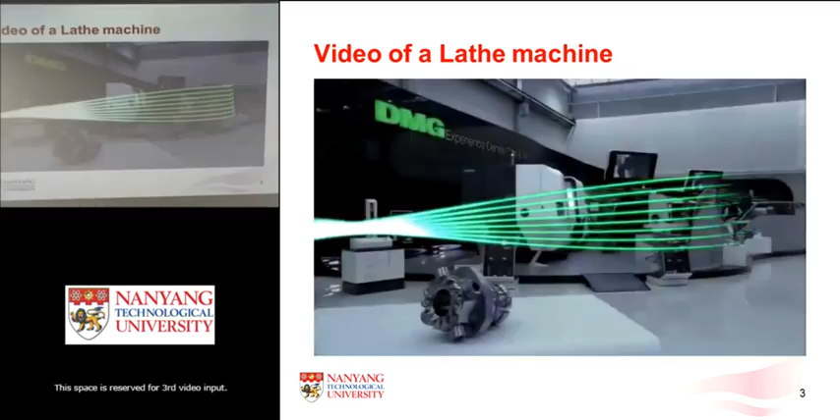Okay, before we start the lecture, I'd like to show you a video. I don't know how many of you have seen or programmed a CNC machine before, but this one, DMG Mori, we currently run a collaboration project with. It's the largest CNC machining manufacturer in Germany, internationally recognized, doing all kinds of top rated CNC machines. They have a subsidiary here in Singapore, and we are collaborating with them to develop a dual arm robot to help load and unload these work pieces, because since the machines are expensive, they want them to run 24 hours, 7 days.

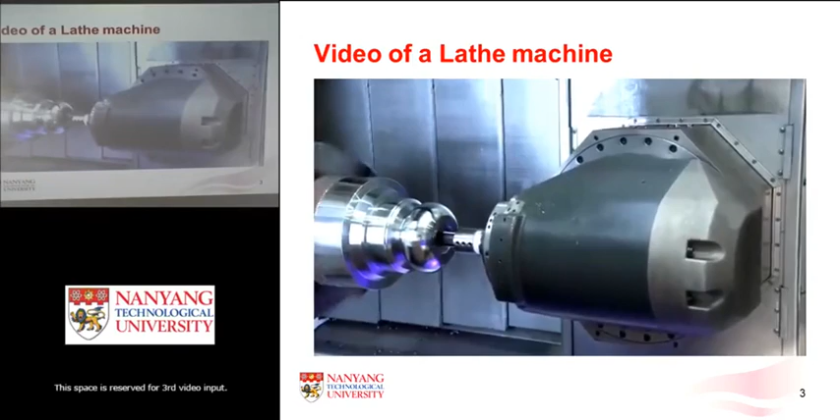In Europe or Japan, human labor is highly expensive, also in Singapore, so they want the robot to do it. Here I'll just show you some idea of how this machine looks and what kind of job it can do. The first time I saw this, I thought it was really amazing, in terms of speed, accuracy, and now they make this kind of machine very complex, with like 36 axes. They can automatically change the cutting tool, for milling or cutting.

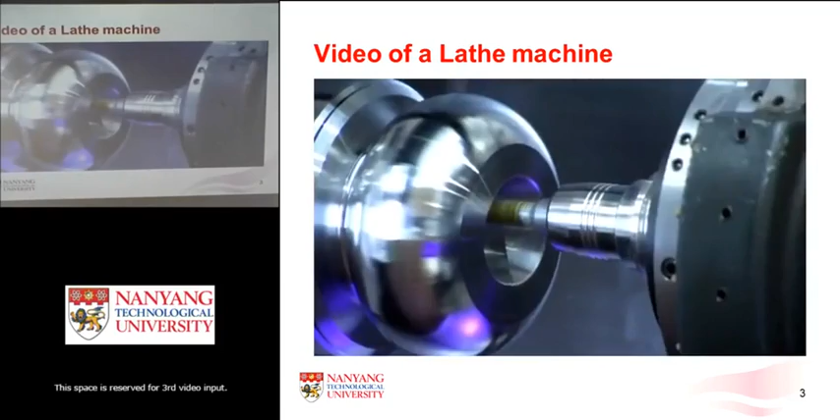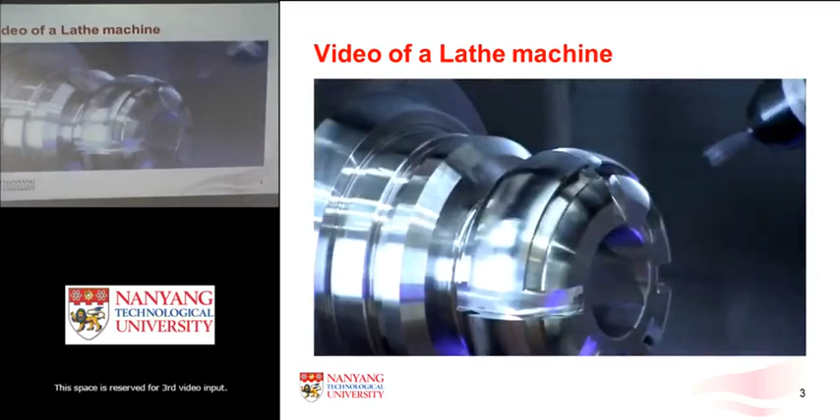Recently, they are also using a kind of laser technology for additive manufacturing. In Singapore we have a very nice industry for aerospace engine repair. So let's say you have an airplane working in Singapore, and you want it to take off again in a short time, but you're short of components. Components manufactured in the US or Europe take several weeks to arrive. With this kind of machine, they can build complex components for airplanes without wasting materials, because they use laser-based additive manufacturing plus CNC cutting and milling.

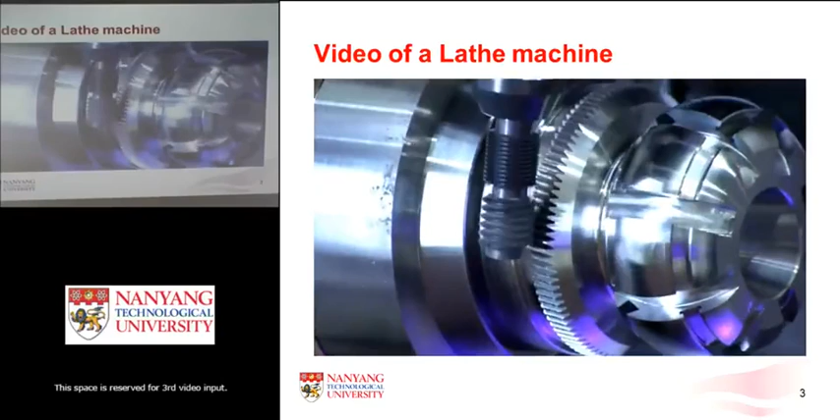I recommend you search on YouTube if you're interested, to get more knowledge about how it works and what problems it has. I think this is a very important area for industry, because it can make all kinds of components for automobiles, aerospace, ships. Okay, so that's just a quick introduction.

Now we come to vibration, chatter vibration. Actually there are two kinds of vibration here we are talking about. First is the cutting force can be periodic, in case of milling. If you remember the last lecture, Professor Tegu already introduced the machining structure—actually it's not a very rigid body.

It can be modeled as a single degree of freedom damping spring system or multi-degree freedom mass damping system. So it has some vibration, and if you apply the cutting force on the workpiece, it will cause this kind of periodical vibration. Of course, there are also other factors such as the non-symmetrical cutting edges of the workpiece, a run out of your cutting tool, or unbalanced mass between your workpiece or cutting tool, and all these factors will have an influence on the cutting force.

So the problem is if any harmonic of this periodical excitation force matches the natural frequency of the machine structure, as you already saw in the last lecture. There is a structure frequency of the machine, this mass damping system. So if you have this kind of harmonic periodical force on it, there will be excessive vibration as the output result, and that will greatly influence your machine and your product quality.

Before that, I want to show you what will happen for this kind of chatter vibration. This is an animation showing a lathe machine cutting operation. As you can see with the time lapse, the vibration between the workpiece and the cutting tool is becoming bigger and bigger, because the cutting force is harmonic with the natural frequency of this machine structure.

This kind of thing we need to prevent from happening, otherwise the manufactured workpiece will not be good quality. So this is a self-regeneration of this kind of vibration because of the structure's natural frequency combined with the cutting force.

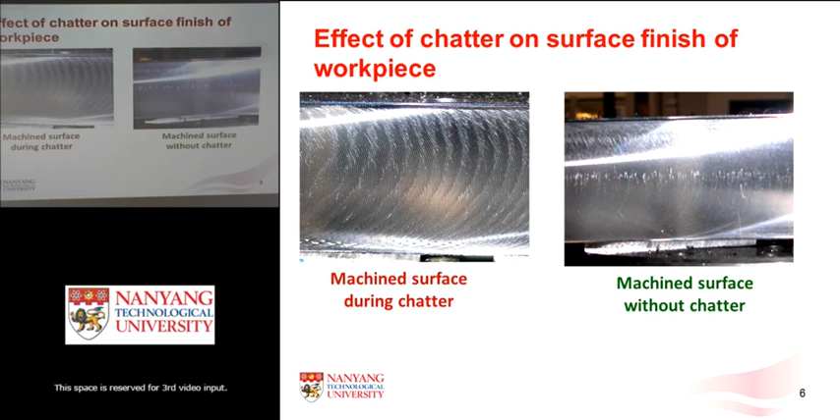So let's take a look at how this happens. There are several steps for a machine to exhibit this kind of chatter vibration. The first step, as you already saw in that animation video, is that the cutting process involves periodical forces due to several reasons - one being due to the unbalanced mass or the run out of the machine tools.

This periodical machining force, if its harmonic interacts with the machine structure frequency - like 2 or 3 or 4 times this harmonic natural frequency - will result in a large vibration amplitude on the surface of the machined workpiece. This results in a very weird surface pattern, where some parts of the workpiece are deeply manufactured, but other parts are not so machined.

So since you are mounting the workpiece on a spindle, when the workpiece turns around, the next cutting edge will cut material with different variable thickness. As we'll show you later, if there is a phase shift, this kind of chatter will grow. But if there is no phase shift, this kind of vibration will stay in a certain area so the surface remains smooth.

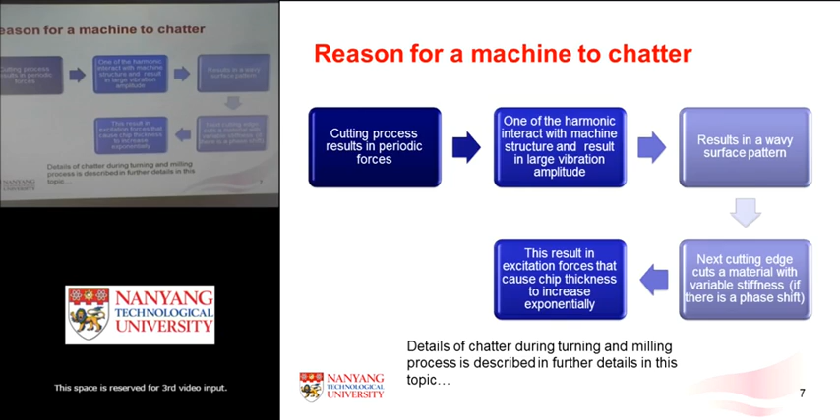And you have your machine tool here to machine this workpiece, and here we call this dimension A. So here we show you different side views of this example. I will explain to you in more detail here.

So here you have the machining tool. You apply this kind of machining force on this workpiece, and this workpiece is actuated by the spindle at a certain speed. So let's take a look at how we calculate this chattering and vibration.

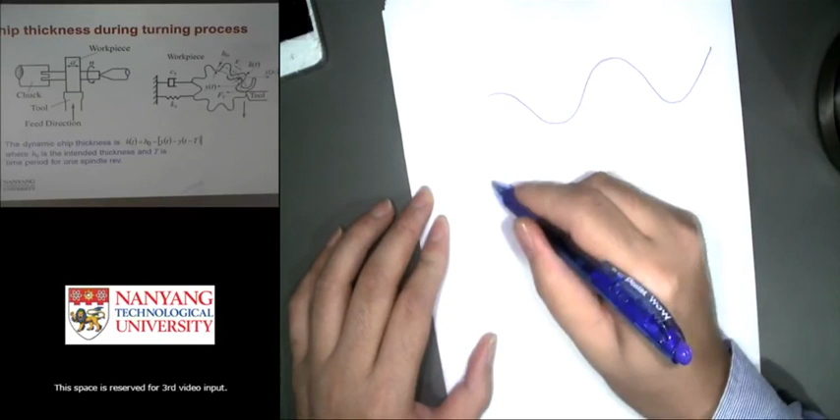So let me draw the profile of the workpiece. Definitely there will be some phase shift. Here, this is the axis of rotation. So here you have the thickness you want to remove, the chip thickness. Let's say it's the intended thickness H0. Don't know if you can see it clearly.

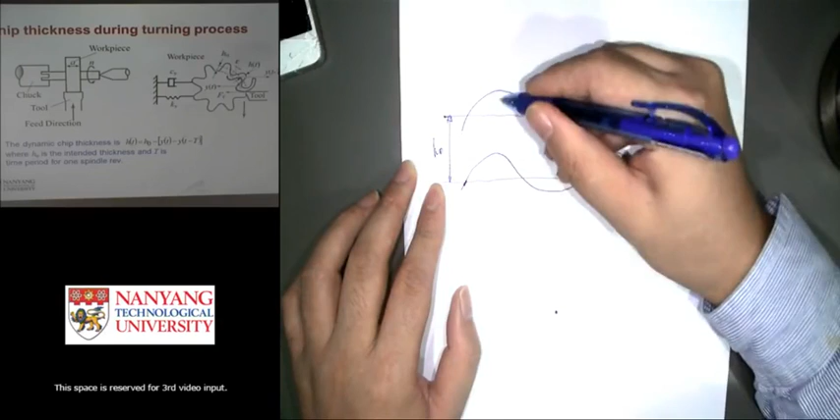This H0 is, let's say, the ideal condition when you want to manufacture this workpiece. Every time the workpiece rotates, you want to remove H0 thickness of the chip. Let's say this is 2 revolutions. When you manufacture here, this curve, and the second time it comes back, it will be removed until this surface. So here, let's say this is the actual chip thickness — the real removed thickness on the workpiece.

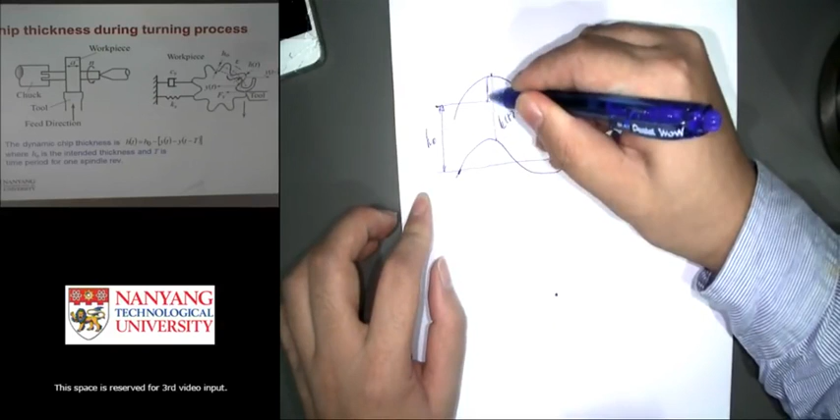So there will be a difference between H0 and h(t), of course. We can calculate this. Let's say the distance from here is the displacement in the axis direction, as we mentioned in the last lecture. Because you're doing this kind of mass-damping system, you have applied a force, and you also have to define the displacement caused by this force, y(t), or F(t). Right, so this is the same.

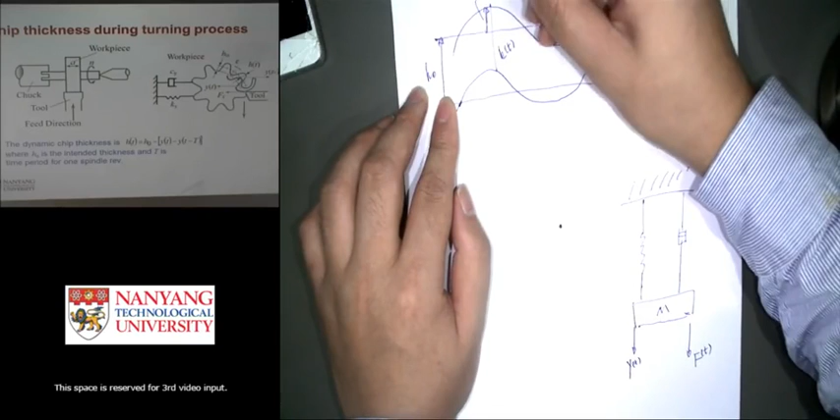So here we say this is y(t minus T), and T is the time period for one spindle revolution. And here we define it as y(t), the current distance. From this figure, you can easily work out: h(t) equals h0, plus y(t minus T), minus y(t). So this part plus this part minus this part — this is actually the actual chip thickness, and this is the intended chip thickness.

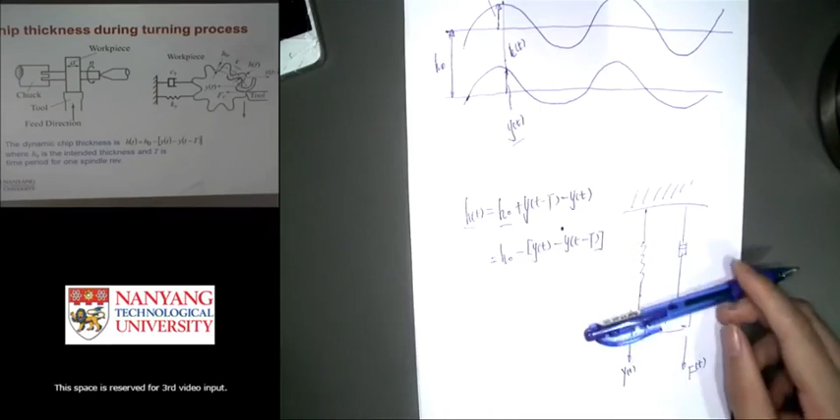So let's do some work here, and you have y(t minus T) minus y(t). So this is actually the equation showing the relationship between the intended thickness H0 and the actual chip thickness, if you see this model as a 1 degree of freedom model.

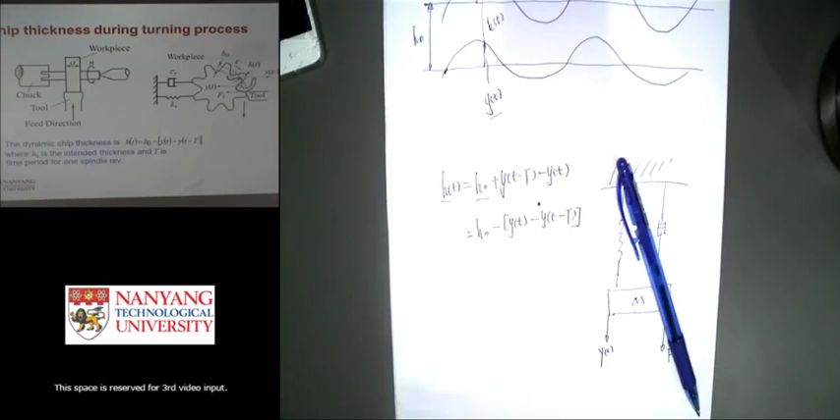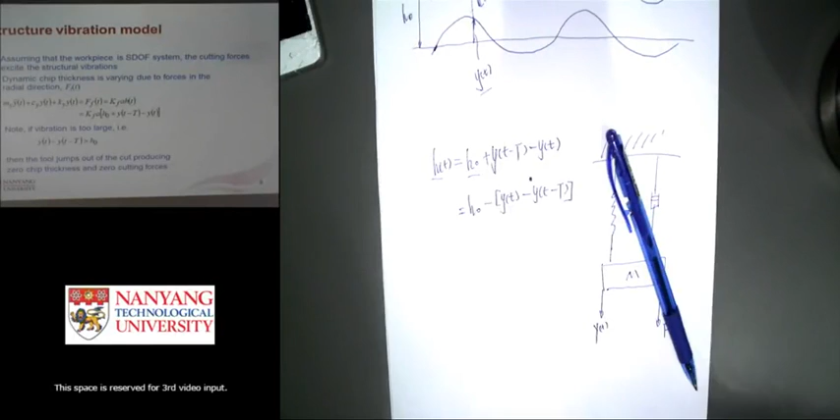So let's move to the next slide. We are going to do a scientific modeling of this system and see what causes this kind of chatter vibration. So here we are assuming, as I told before, that this system is a 1 degree of freedom system, and because of this cutting force, it will excite the structural vibration of the CNC machine.

So the dynamic chip thickness H(t), as mentioned, will be varying and changing due to this kind of cutting force applied on this workpiece in the radial direction, because we assume it is a 1 degree of freedom system. And then we apply this cutting force F(t). It's very easy to obtain this equation, because last time you already experienced how to model this kind of two-body dynamic system. They are the mass, their coefficients for the spring Ky, and the coefficients for the damping Cy. All these things together are equal to the cutting force in the radial direction, F.

But F can also be expressed as K*F*A*H as shown here. This K is actually a parameter that relates to the material of the workpiece. Let's say you cut a very stiff, hard workpiece — you need more force. If you cut a kind of soft material, you don't need so much cutting force on it. A is just a parameter showing here the dimension of the cutting force, and H, as we have already modeled, is the actual chip thickness.

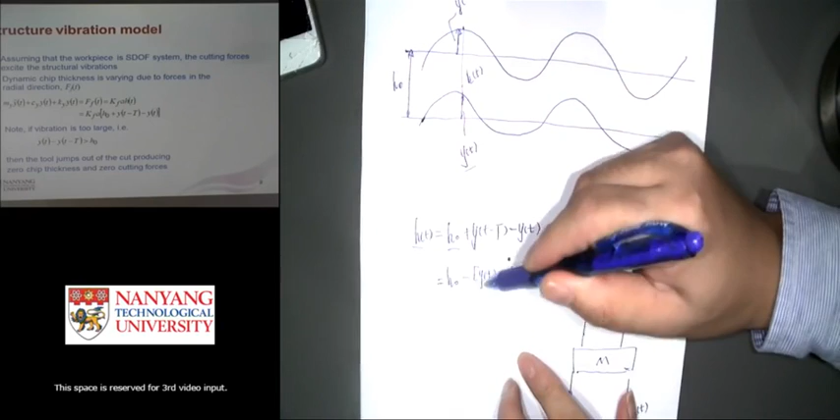If you see clearly, if you have y minus yt bigger than h0 in this equation, then h, theoretically, would be a negative value. But this is not realistic in the real world. Why? Because you cannot have a negative value since you're cutting the workpiece. This means the cutter will actually jump out of the cutting zone, producing zero chip thickness. HT will be zero, and there will be zero cutting force. So this is the condition we worked out from this equation.

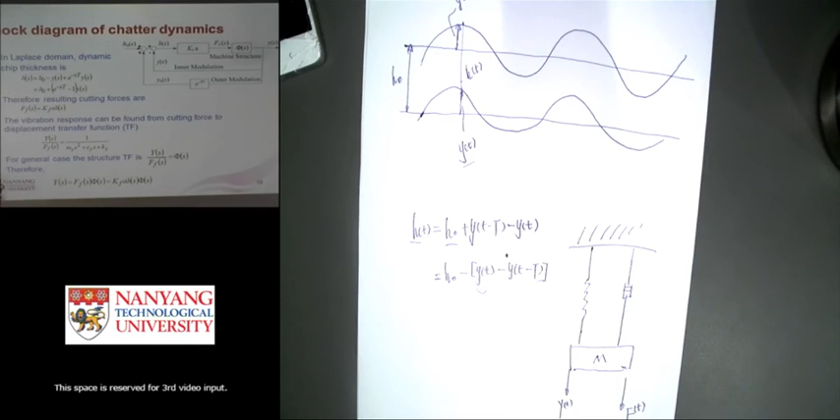Here, let me show you a block diagram, maybe it's better to show here so everybody can see. We already have this equation for the actual chip thickness, which we just wrote on this paper.

If we do the Laplace transform, we get the dynamic chip thickness in the frequency domain, as shown in this equation. Also, as we said in the last slide, the cutting force can be equal to KF times AH. It's a function of the actual chip thickness, and these parameters depend on what kind of material you want to cut.

So we can deduce the transfer function between, let's say, the output, which if you remember is the displacement in the radial direction, this is one degree of freedom, and F, the cutting force, which is the input. This can be modeled as a two-order dynamic system. This is the equation of this system, written in this way.

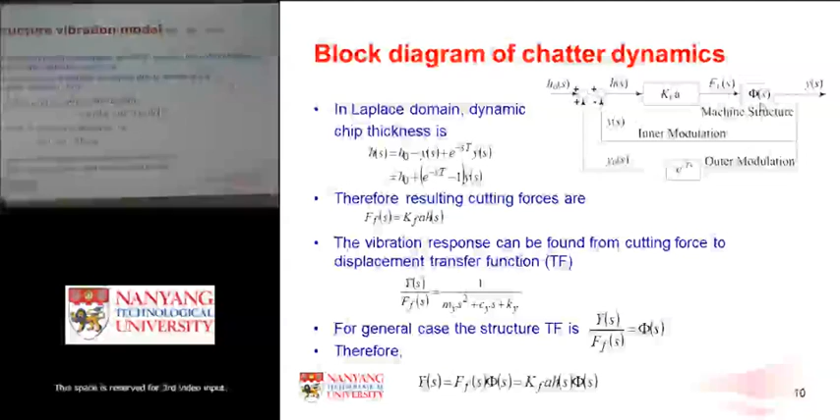So if you want this equation to be 0, actually with this transformation, we assume the transfer function of the machining can be divided into 2 parts, the real and the imaginary parts. For example, do you remember this is the TF of the machine structure? It's the open loop. It's a physical characteristic of the dynamics of the CNC machine structure.

Just a 1 degree of freedom dynamic system. Actually, you substitute the TF into this equation, and you do some transforming, and you rewrite this equation into this kind of format in 2 parts: this is the real part, and this is the imaginary part. As you can see, there's a G here. And then based on this equation, we will analyze and get some key parameters about the chattering vibration.

So here, because we are assuming in this condition you want S to be 0, or sigma to be 0, then these 2 parts should also be 0. Both the real and imaginary parts of the equation must be 0. So first we look at the imaginary part of the critical equation. If you want this part to be 0, and this part is 0, then the whole equation will be 0.

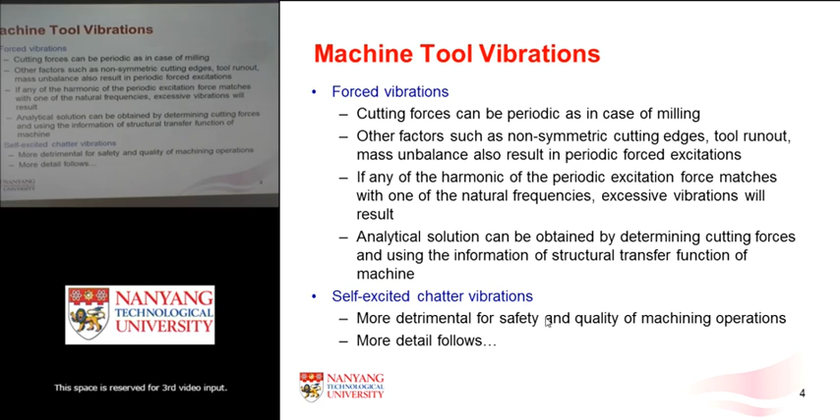This cannot be prevented, because the machine is a dynamic system, or because of tool problems, or mass imbalance of the workpiece or the machining tool. But here, this one is stable - this kind of regenerative chatter vibration in this situation.

If the phase angle is 0, we can also deduce the angle value of this one. I will show you later. And remember, we want this equation to be 0, and we divide this into a real part and an imaginary part. We're just considering this part to be 0.

And then we deduce the relationship of the chattering vibration frequency in terms of the spindle revolution velocity and the phase difference. These are critical parameters related to whether the vibration is stable or not. And in order to prevent this vibration, you still need this critical equation where the real part is 0.

So here we come to the real part of this critical equation. That is this one, and then you can calculate the maximum - let's say A is the maximum axial depth. You know the axial depth is the feeding alongside the feeding direction of the machine tool, right? It's actually Y, for the chatter-free machining. So this is a critical value.

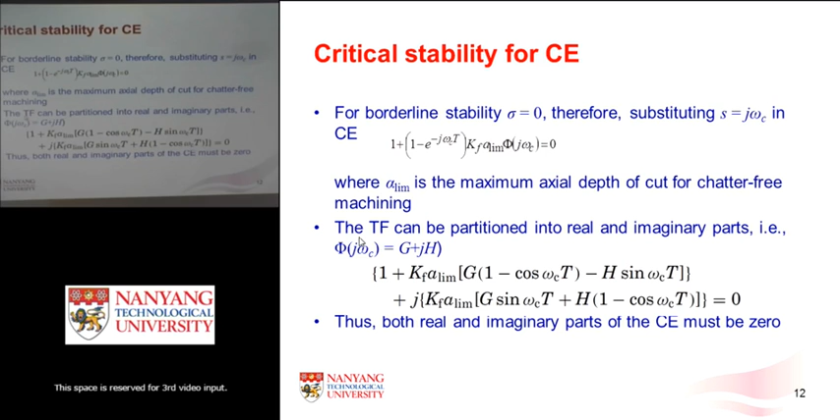So here we come to the conclusion again. Actually, if you have a depth of cut bigger than the maximum allowed value - let's say you want the machine to cut a lot - then chatter will happen. And if you regulate the feeding speed or the intended cutting thickness within this maximum value, there will be no chatter happening, because this limit, if you think about it, it's very intuitive.

This a lim - let's take an example with hard material, a very hard material. You will of course reduce to a very small value of the regulated value. You cannot cut a lot if you are cutting a very hard material, right? And if you have a very bad system, like the machine shaking when doing machining, not rigid, you have some problems with components installed on the machine.

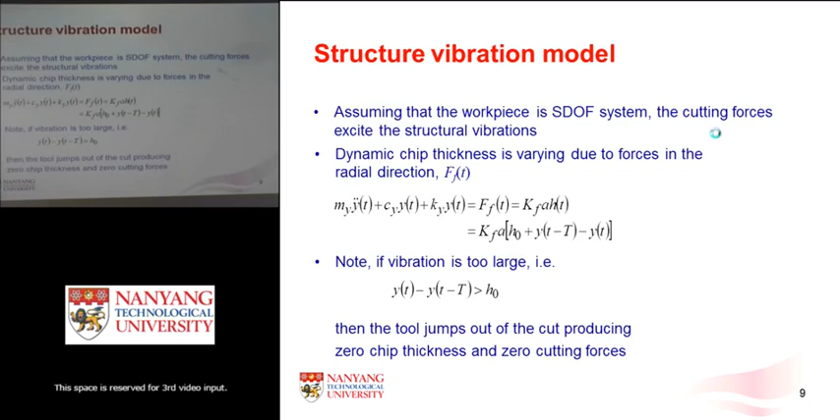This means this kind of value is not so rigid. There will be a lot of vibration here. So if you look at real machines, they have a very heavy base in order to keep this value lower when you do machining.

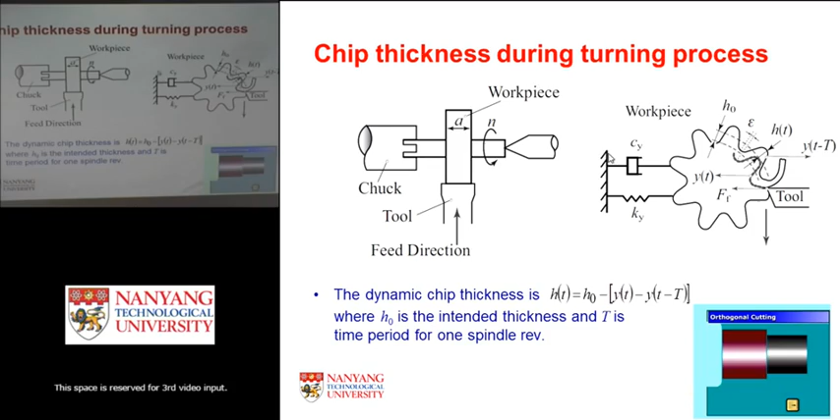Because when you do machining, of course, you will build vibration. But if you have a very rigid body, without any clearance, and reduce this kind of damping or spring value, you can get a really good stiffness. If you have a bad machine, this value will be quite small, and then you cannot cut too much, otherwise this will introduce chatter vibration.

So if you have a very low value of this a_lim, the chatter works more easily. This is actually the kind of design principle guideline for CNC machining manufacturers. They want the machine to be stable, with no vibration between the workpiece and the machine itself.

In order to increase this a_lim - that means, from the customer's point of view, it's good, because you can cut your materials in a more productive way. If you have a very big a_lim, then you can cut more than with a small value, so the speed can be increased.

Let's say before you could only produce 90 pieces of components in an hour. Now you increase this value, and now you can produce 100. So this is really, from the chattering analysis point of view, a very critical value.

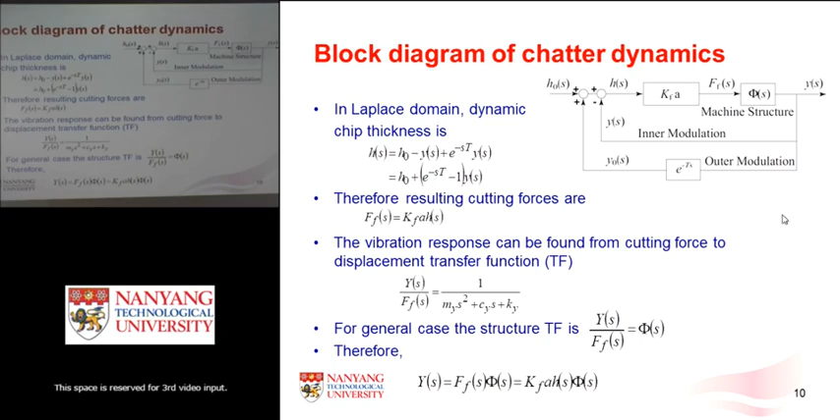What does that mean? Because we have a natural frequency of the structure - the machine's physical dynamic structure has its own frequency. As we said, if this frequency harmonizes with the machine frequency, it will cause this kind of vibration. So the chatter vibration frequency is actually nearby the natural frequency of the structure, but it's not the same.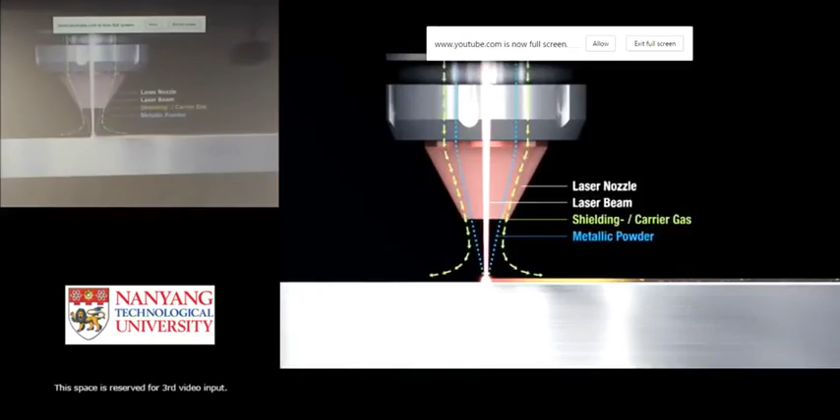Okay, so for the guys who didn't take a break, I'd like to show you this laser, this kind of state-of-art technology in CNC machine manufacturing. Actually, I know this one, it's very impressive. In the multimedia, you should see this, it's really impressive. Other things use plastic material, but this one is really using laser to do this kind of additive manufacturing. What's important is they combine these two kinds of machines together.

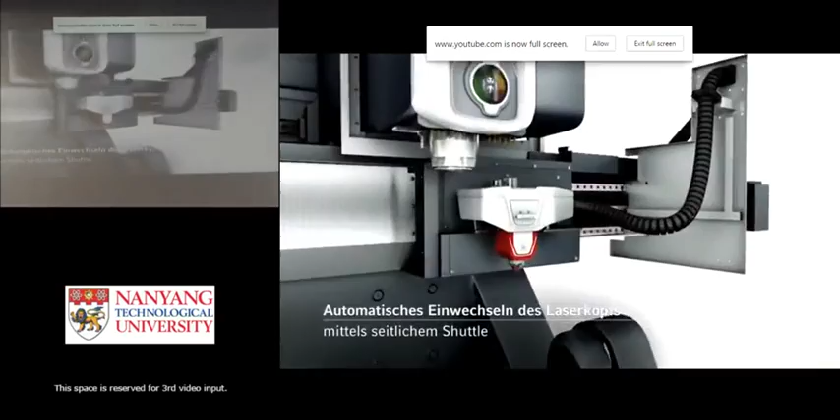Actually, if you want to manufacture this one the traditional way, it's not an easy task, and it wastes a lot of materials, because the inside is hollow, so you take a lot of time and waste a lot of material. But with this technology, they can really build this very complex component. Actually, this is a component for an airplane. They just change the tool, like a 3D printer, you print this kind of material powder, and after that you change to a milling tool or cutting tool to do perfect milling.

For this kind of critical component, you can replace a broken component in a very short time, and after this you do milling in the same machine. I think NTU is going to buy this machine, Professor Tsai. They have a strategic collaboration with DMG Mori. If you have the chance, you should definitely go take a look.

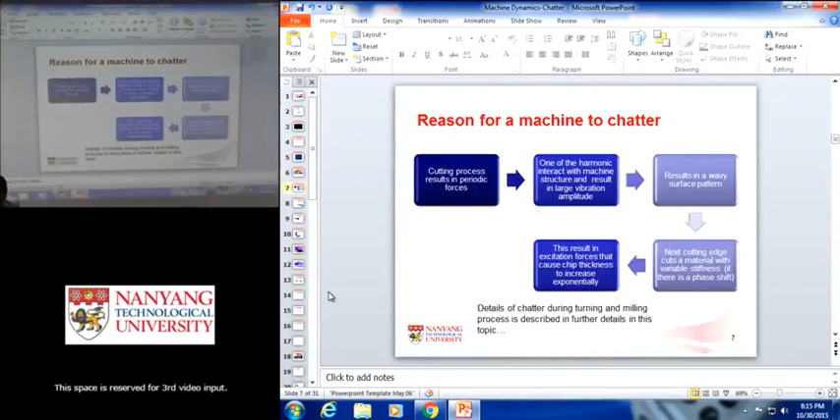Okay, so we come back to the lecture. Because Professor Tagore, after he introduced the 1 degree of freedom system, also introduced the 2 degrees of freedom mass-spring-damping system. This one is more complex than the single degree of freedom system, because it integrates together all this kind of phenomena.

It's a little bit complex. So here actually is a picture showing a kind of milling process. The last single degree of freedom system we modeled as a cutting system in orthogonal axis kind of cutting.

This kind of milling, I don't know if you're familiar with it. I'll just show you a video, the most intuitive way to understand. So here is the video showing a CNC milling machine. Actually it's a 2 degrees of freedom system, if you say it works in a plane, the two-degree freedom system moves in a plane.

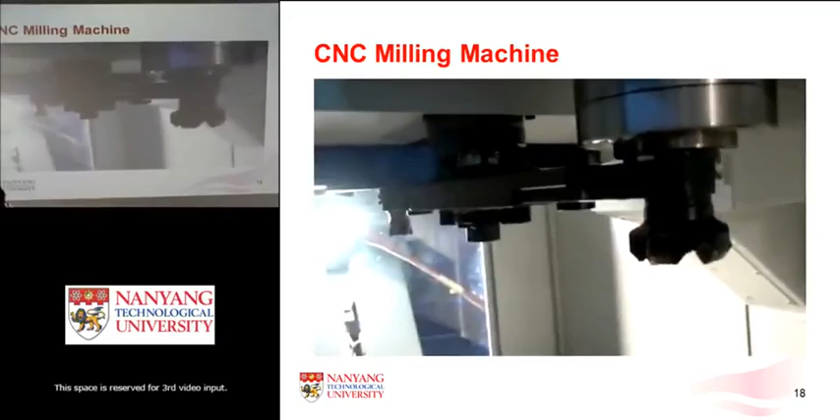But it also has some axis movement capability. So it's doing some polishing. It has 2 degrees of freedom, like changing the tool. You do the machining. You can move in a plane with 2 degrees of freedom.

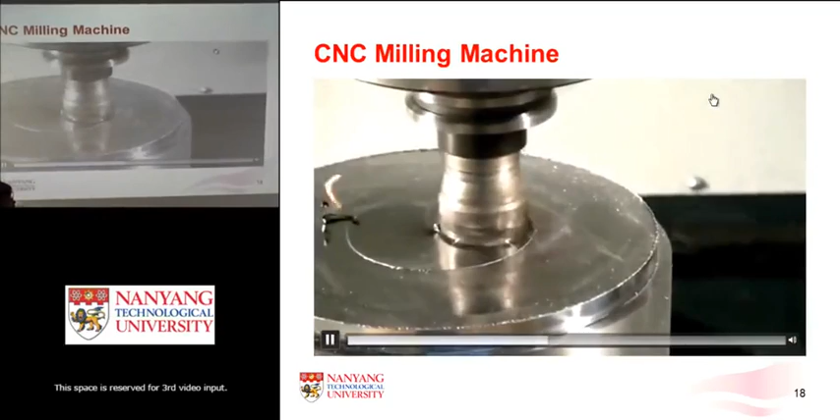So this kind of 2 degrees of freedom we can model in this way: you have this machine tool, the mass object, with 2 dynamic system parts. Also simplify this spring or damping. There will be cutting force normal to the workpiece, and also cutting force parallel to the workpiece, and this is very similar.

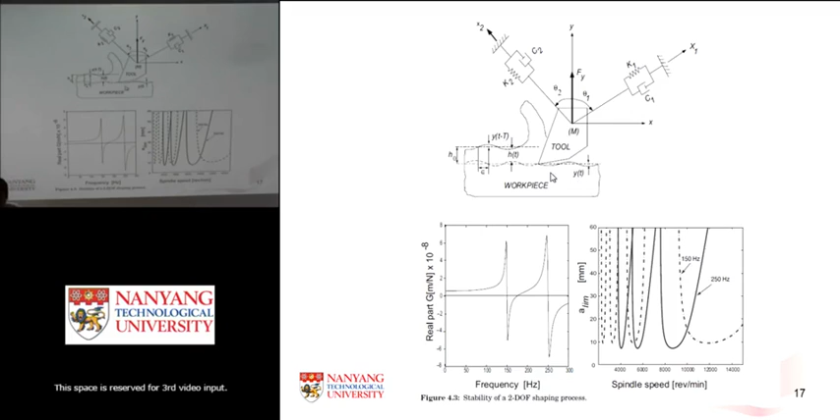But there's some difference. If we look from the top down, you can have this kind of system - you can move in the x-axis or y-axis, so it's 2 degrees of freedom, plus also 1 degree of freedom. Each one is a kind of mass-damping system, but they're coupled together, making this modeling more complex than a single degree of freedom dynamic system. So here you have the workpiece.

Of course, here the dynamic chip thickness is a little bit different because you are not dealing with only one axis, you are dealing with 2 axes, x and y. So we are modeling it in this way: you add angle as a parameter. Because the other one we just considered y as displacement caused by the machining force on the tool. Here we have 2 parameters, and then the dynamic chip thickness.

Actually, you can see from these 3 figures. The first figure shows the static chip thickness. It's what we want, h0, right? And then you should subtract the vibration at the present tooth period.

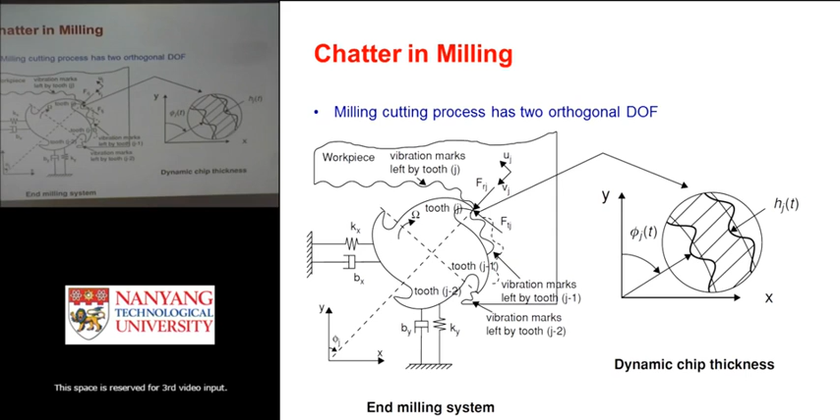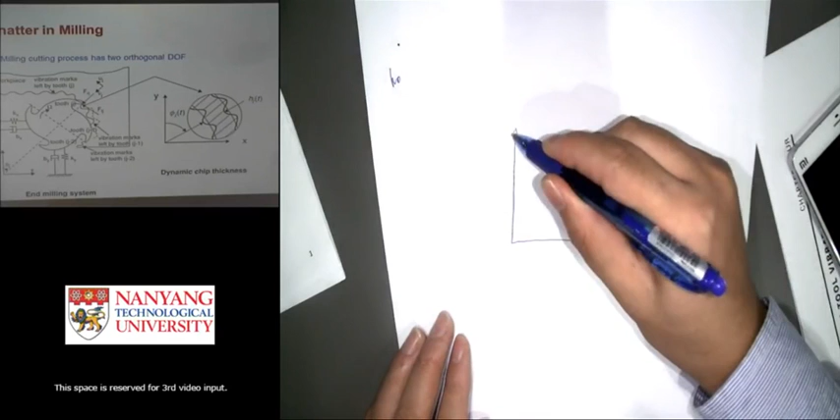Okay, so you have this kind of 2 degrees of freedom system, x-axis and y-axis. Here you have another parameter, which is angle, except for the time. So actually the vibration in the x-axis, right, here.

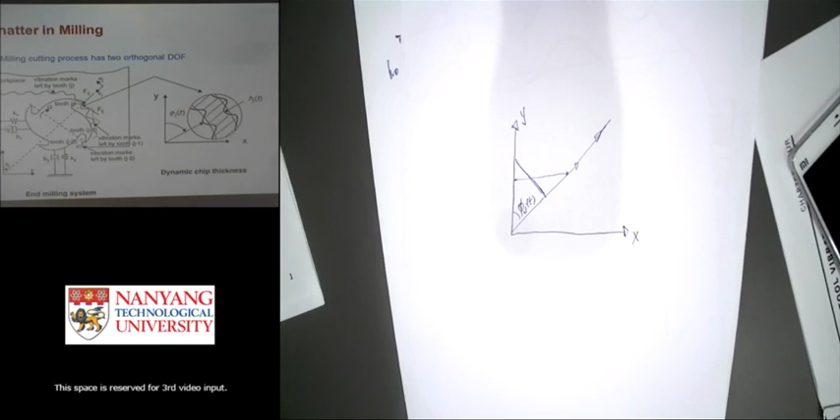Oh, let's do it like this. Should be done like this. Because you contribute to the displacement in this direction, the current tool moves to this direction. If you see this figure, this is the displacement we want - it's the dynamic chip thickness.

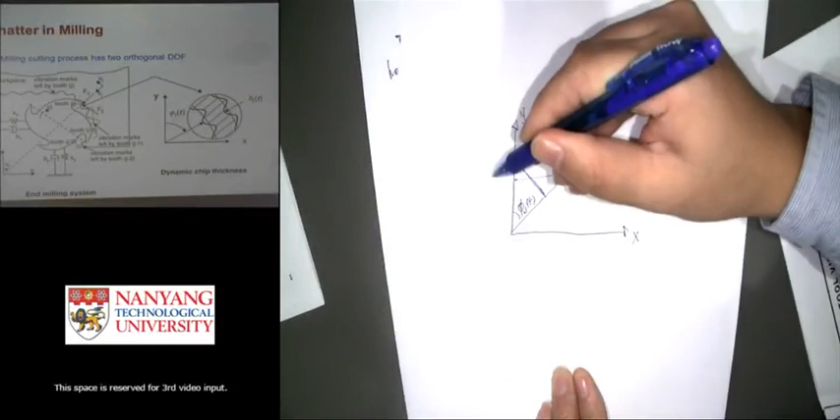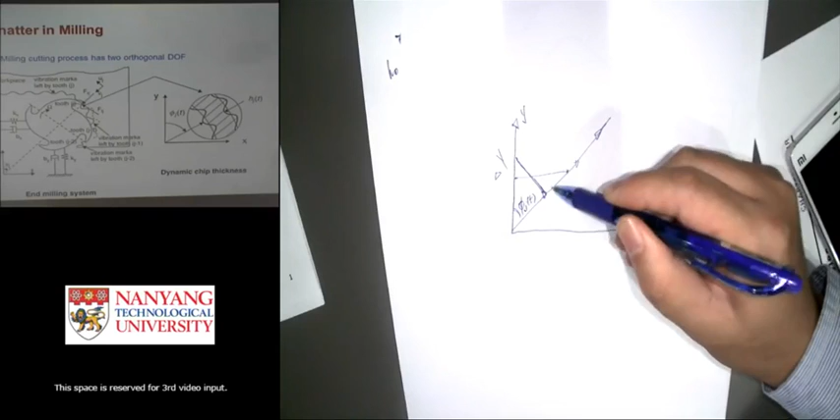So let's see how this displacement in the x-axis and y-axis contribute to this one. So if you do this, let's say here you take y - if you take y, you do the cosine theta, you contribute to the displacement in this axis. I don't know if I've explained it clearly.

And the same reason for the x-axis, right? So it should be like this. If this one is theta, then it should be this one theta. If you contribute here, delta x should be sine delta x. Its distance should be delta x sine. So this is the equation we obtained, that in x-axis and y-axis contribute to the displacement along the cutting tool axial axis. This is just a unit step function.

Okay, so it's the same. You need to think about the relationship between the cutting force and the displacement, the vibration distance of this kind of dynamic system in 2 axes. And in last lecture, Professor Tagore already did using a matrix, so it's more compact. You can write it into equations, but this kind of matrix looks more slim and meaningful, right?

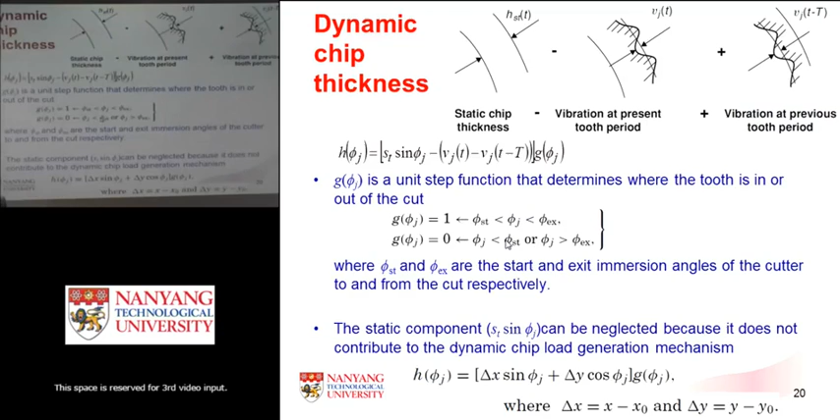So the details here, it is the equation for this kind of 2 degrees of freedom system. But I remember Professor Tagu just told you they are in a serial chain, right? You have two masses connected in a serial chain structure, like 2 masses, 3 springs, right? But this one is only 1 mass and 2 spring-damping system. So the equation could be different, but it's easy to deduce.

Okay, so this is a fundamental difference between milling and turning operation, because in turning the force direction is along the feed direction of your tool and is constant, but this one the force will change, because of the displacement difference in x and y axis.

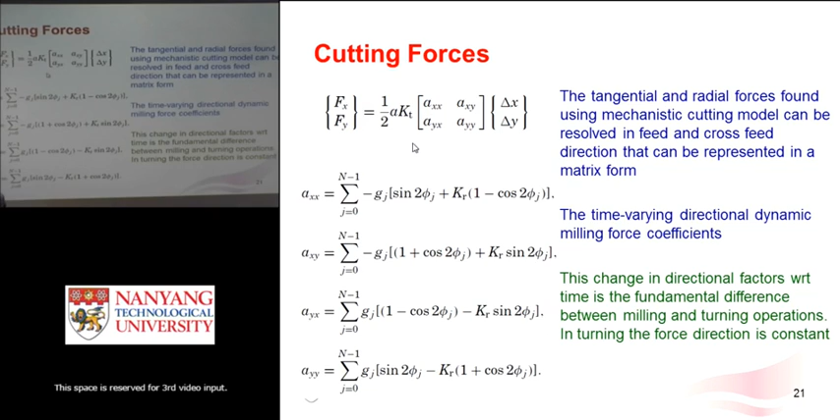Okay, so also we need to consider the stability of this kind of chattering vibration for this milling process. And we're considering the zero order solution, because for high frequencies it can be more complex. So here I will not give you more details, because these kind of equations are a little bit hard to understand in a very short period of time. But don't worry, I will not test examples for this part, on the whole system. You don't need to worry about it.

Just have a general idea of how it works. And if later you encounter this kind of problem, you just refer to the textbook and do as the following. It's just some deduction of this kind of matrices, the force matrices, and you get the dynamic milling force in a very compact way, related also to this kind of directional factors, and also the displacement in x or y axis.

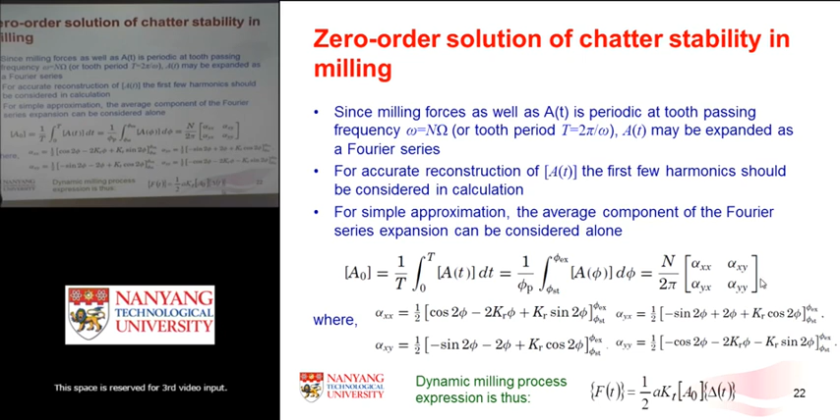Right, here is the matrix. Okay, so actually this kind of machine structure natural frequency, we always do experiment tests. Why? The reason is you cannot model this kind of machine easily. You can, but it's very difficult to get the parameters, like what's the value of the spring, what's the value of the damping, how heavy it is. How heavy it is you can calculate, but it's always not so precise.

Nevertheless, this machine cannot be modeled as a single degree of freedom. It's a multi-degree of freedom, with different frequency characteristics. So always in a practical way, in engineering, they always do experiment tests. In a numerical way, they obtain the natural frequency of the machine structure.

Like this figure shows, you can use an impact hammer, and you have several accelerometers attached to the spindle of the machine, and you receive this kind of sensing information through an amplifier, and then you record this value in your computer. So you repeat this kind of test. Of course, you can use a mechanical device to automate this procedure.

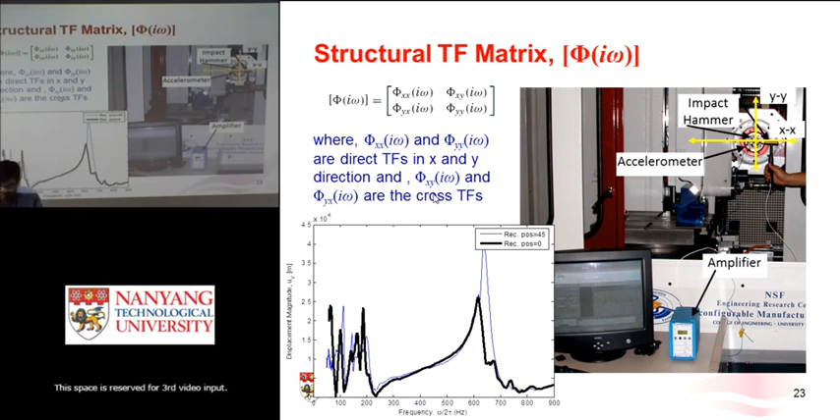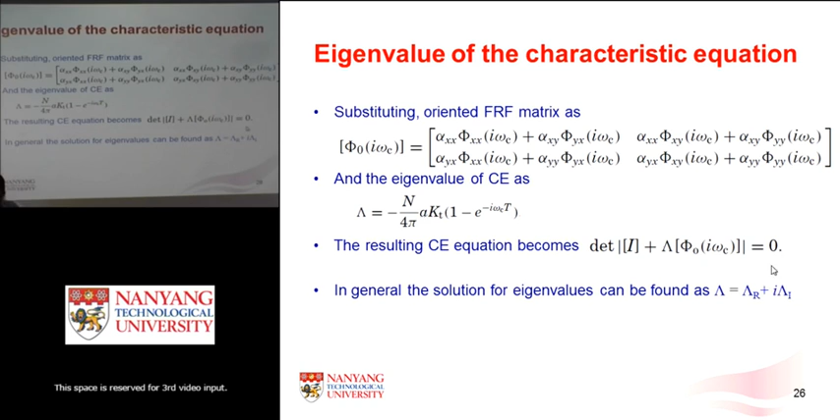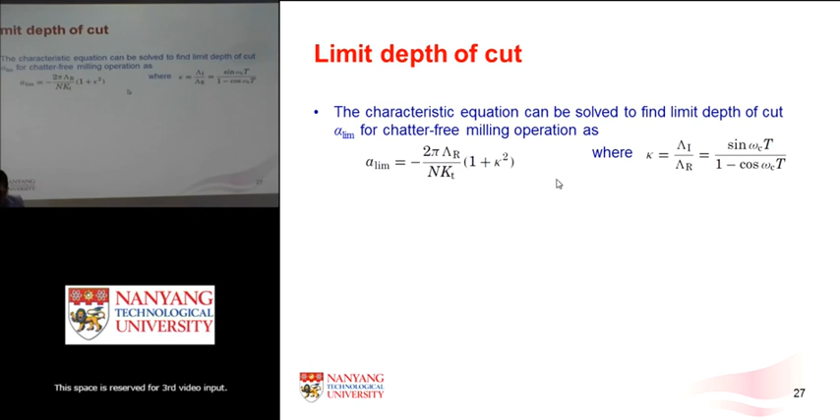So here we come again to the limit depth of cut for the chatter-free milling operation. This is not one value, it's a vector in x and y directions because you have the matrix, and also the corresponding spindle speed, similar to what I presented for the chart in single degree of freedom orthogonal cutting.

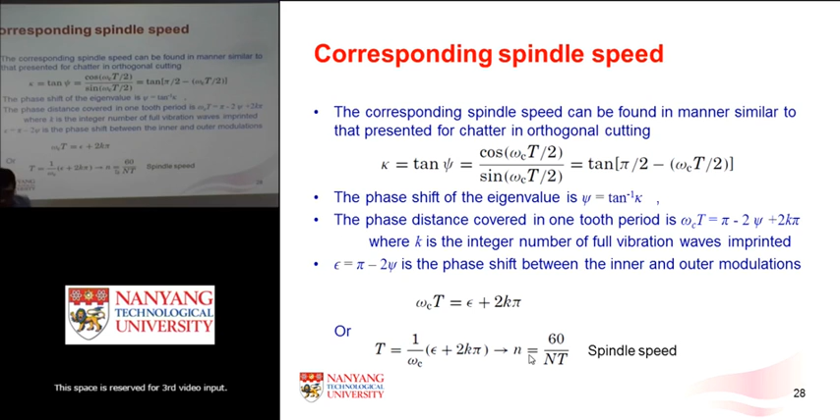So I will not propose more details about this, but if you like, you can read the textbook instead. But here they can calculate this kind of spindle speed as a function of time. So also there are algorithms.

You can select the chattering frequency around a dominant mode, which is near the natural frequency of the machine itself. You need to solve the eigenvalue, that is kind of critical parameters, as we did, like phase difference angle or the maximum depth of cut. And then you can make a map the same for this kind of machine. So it's a different method—you just need more advanced mathematical tools to deal with it.

And this can also be very helpful for design firstly, or programming the machine to get better performance.

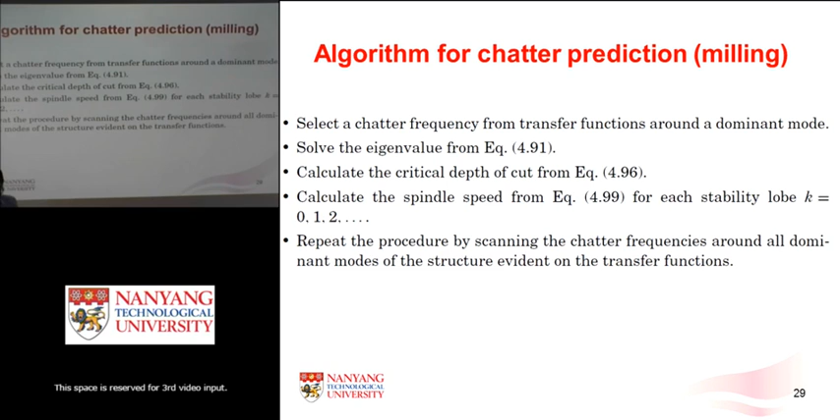Okay, so here there's some experimental results to show this kind of stability of the chatter vibration. The x-axis is the spindle speed revolution of your chuck spindle, and here is the vibration—it's the axial depth of cut. So of course, as you increase spindle revolution velocity over a certain period of time, you cut more. So you select a kind of spindle speed, and you can get this kind of feeding force in the time domain.

And if you do the fast Fourier transformation to do the frequency analysis in the frequency domain, you can find that there is not much frequency causing chatter vibration. So this is a kind of stable condition.

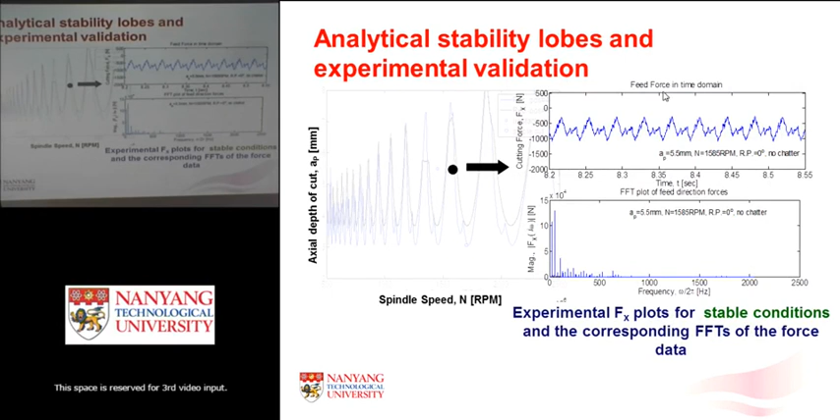Okay, I think we come to the conclusion, and next lecture I will give you a presentation about the CNC machine, how it works, what's the structure, and how you can program the CNC machine using G-code.

That one is very important. If you're an engineer, you definitely need to know how to program a robot or CNC machine using G-code—the basic knowledge. Because if you do mechanical, or even learn robotics, there are now people using robots to do CNC machining.